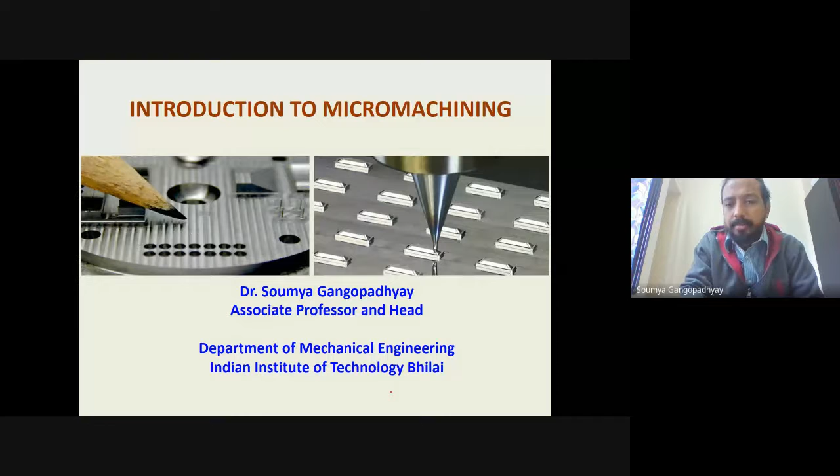Okay, no, I was trying to give just a brief introduction, just the background story, and then I would like to go slide by slide. No. Okay, so fine, so this is the background.

Why we should go for this micro machining, and that's why I took a lot of interest, well, I am working in the domain of metal cutting at the macro level. I also do non-conventional machining like electro-discharge machining, electrochemical machining, again at the macro scale. But there are enough opportunities to work in the domain of components where micro features need to be generated, and it is an emerging area. You will not find a lot of research groups still in India working in this domain.

There are a variety of reasons maybe, but let us talk about why we need miniaturization. I have talked a little bit about the background information, the brief introduction of micro machining. Now the thing is, less material consumption during manufacturing.

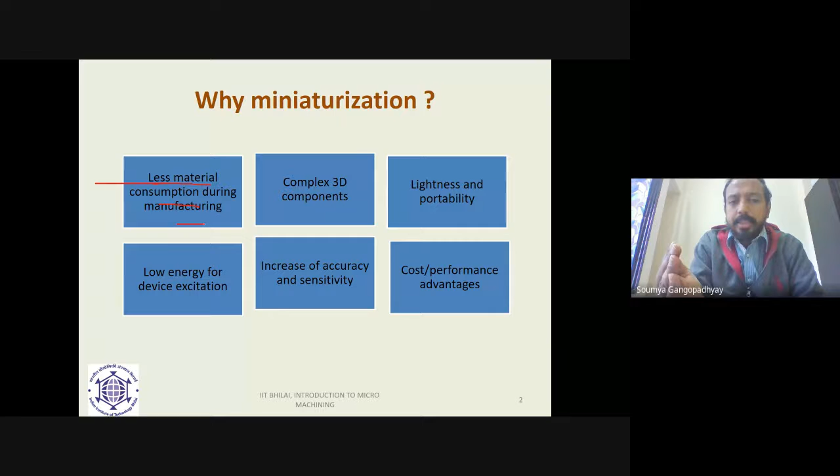Micro machining involves the speed, feed and depth of cut at a very, very low level. Whether you are doing micro turning, micro milling, micro drilling, micro EDM, or micro ECM, the amount of material which gets removed is very small, and the features that we need to generate can be obtained by minimum material removal. So less wastage of material is one thing.

Then there are many complex 3D components, 3D features, which cannot be generated with the conventional machine tool or conventional cutting tools. Traditionally, when talking about these 3D components, we take the help of a milling cutter.

Milling operation is a very versatile operation, and there are hundreds of different types of milling cutters that make it more versatile. Virtually any different types of shapes, 2D or 3D, can be fabricated using milling operations, right? But then it is fine.

But then when there are some geometrical complexities, and there are 3D textures, free form surfaces, and that too in a miniaturized form, those actually require miniaturization. Many times these 3D components are not very economical to be generated on a macro scale. Rather, they are required to be generated in the miniaturized scale - I would not say micro, I would say miniaturized scale. For example, 1 millimeter, 2 millimeter dimensional features of a particular 3D component - that is still miniaturization, and that can be done by micro machining.

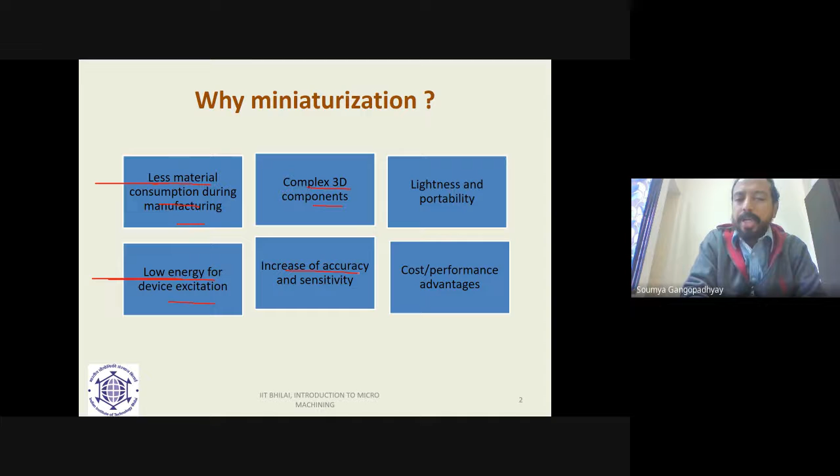And then, when you are doing your work on a very small region, the chance of accuracy, the sensitivity - you can maintain at a high level. When it becomes very big, very huge, very bulky, the chance of accuracy, chance of precision, and the sensitivity, everything will be difficult to achieve at a very high level. On the other hand, if it is on the lower scale, a smaller component, it is more easier.

Last but not the least, there is obviously the cost per performance advantage - that means the cost by performance is low, right? Because why is cost per performance low? Because you are downsizing the component, but you are not sacrificing any functionality of the component.

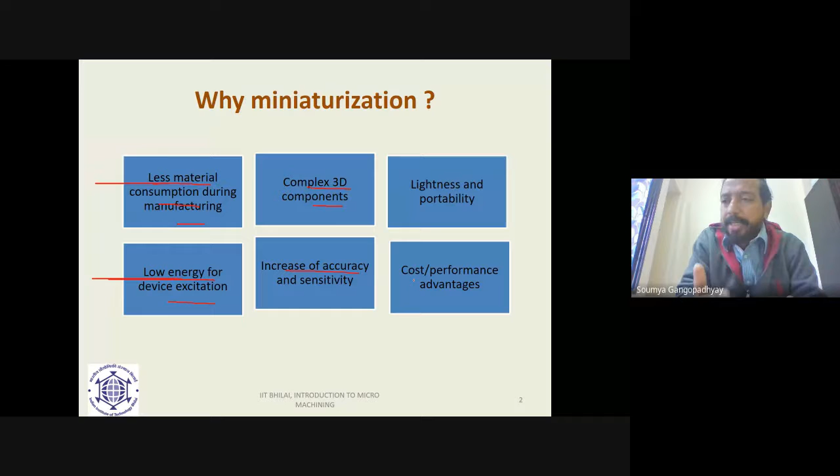Rather, with the advent of technology, you are making the product, even when you are making it compact and small size. So what is the advantage? Advantage is when you are making it smaller, making it more compact, downsizing, then the material requirement gets reduced, so the material cost is reduced, and its performance still can be enhanced, and that leads to the profitability of the component, right?

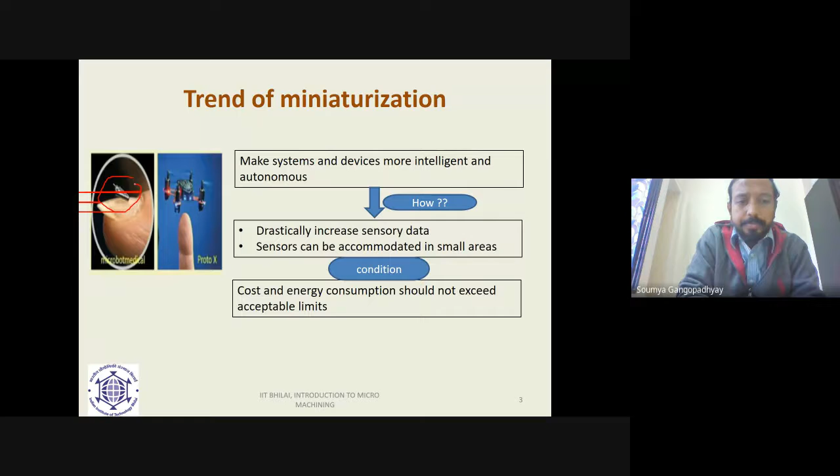So, moving on in the same direction - this actually shows the biomedical components, right? It is a kind of robot being shown here, which are micro robots.

See, the robotics again is a very good example. In industry, you might have seen huge robots in the assembly lines and many other applications, and their size is very huge. Of course its size is justified for a particular application - I'm not saying otherwise - but for some particular applications, you can develop miniaturized robots which can be used for biomedical applications. It can take a lot of information as it can be used as a diagnostic tool.

In fact, as an advanced medical diagnosis tool, people are using micro robots for getting a lot of information from human bodies, from the external surface of the human body. Even you will be amazed to know these micro robots can be actually put inside the human body to extract information from inside. I'm not an expert in that, but I have gone through journals stating that this type of micro robots are being manufactured and used extensively, particularly in USA and European countries.

Okay, then these drones, right? When drones were first invented and developed, there were huge drones used to capture, monitor data, taking photographs, videos, etc.

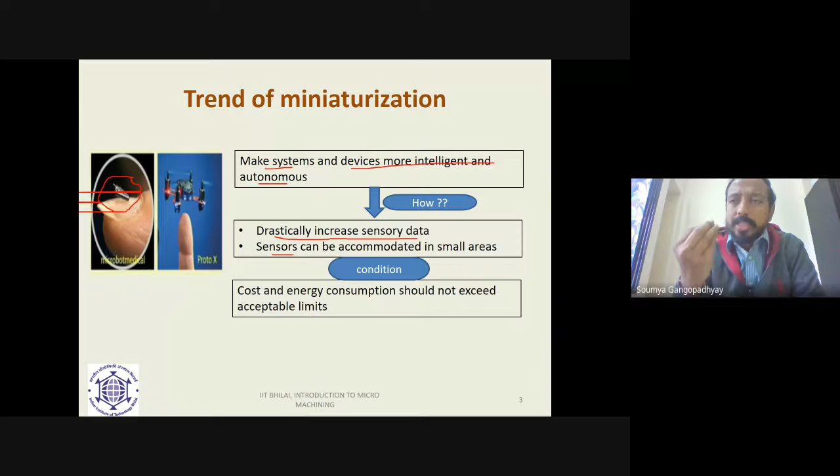How is it done? It is done by drastically increasing the sensory data through advanced sensors. In fact, advanced sensors are also manufactured by micro manufacturing techniques, and these miniaturized sensors can be accommodated in small areas. So it ultimately boils down to the sensors, which are again very small in size. Previously sensors were bulkier, larger size, but now we have the capability to manufacture sensors at a very miniaturized scale.

By downsizing significantly, you are able to introduce more different types of sensors in a particular component, making it more intelligent, smarter, and autonomous.

Having said that, you have to keep in mind that while doing the downsizing and miniaturization of electronic components, you should not forget about one very important fact: cost and energy consumption. If you are increasing cost by doing all this miniaturization, or escalating the energy consumption of the device, then there is no use.

Your components may be intelligent, smarter, more autonomous, but if it is hugely costly and non-affordable, it is of no use. If the energy consumption is very high, it is also of no use. So it has to be energy efficient and cost efficient - these two things are very important parameters in industry.

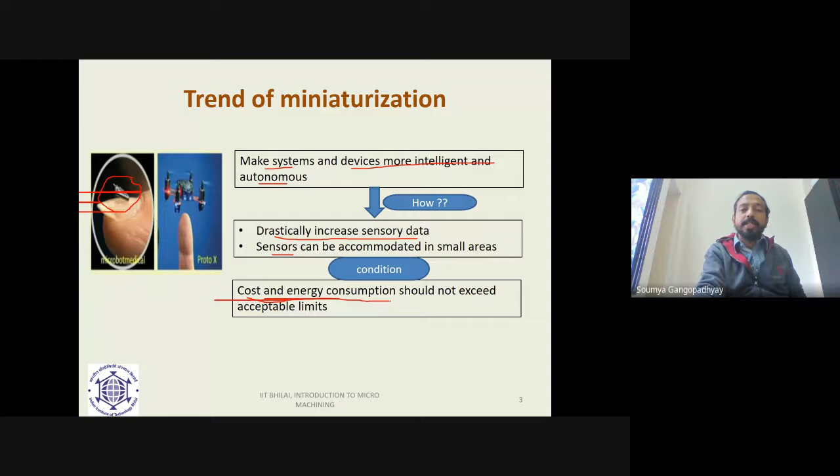For us academicians and researchers, we often do not give much emphasis on these two aspects: cost, productivity, energy consumption, etc. We rather put more emphasis on developing technology and improving product quality. But productivity, cost, and energy consumption are the major requirements from industry that should not be sacrificed while we are doing miniaturization. That is a very important aspect.

I have given many examples, but I would like to quickly tell you that this now has a lot of applications. These miniaturized components, which can be manufactured by micro manufacturing techniques, have many applications in biomedical and bio-MEMS. Bio-MEMS is a very emerging area where a lot of micro electromechanical systems can be developed for biomedical applications. This is called bio-MEMS, and it has now gone beyond micro, to the nano level as well.

From MEMS it has gone down to NEMS, that means nano electromechanical systems. This topic introduces us to a very fascinating world of manufacturing, where there is a paradigm shift. We are observing, in the last 10 years, a revolution in the concept of manufacturing - in terms of downsizing components and making them smarter, more intelligent, and more autonomous.

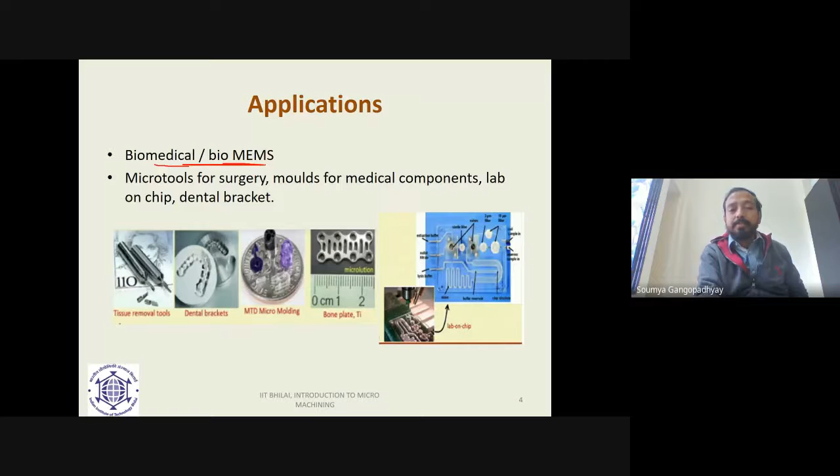Other examples, as I said, are micro tools for surgery. There are a lot of micro surgical tools available nowadays. However, again, in India we are lacking. I have chosen this topic very specifically because this is one of my fascinating research areas where I have been doing a lot of work nowadays, because in India there are hardly any indigenous manufacturers who develop these micro tools for surgery.

Many times we have to import these surgical tools from abroad, and they are hugely costly. But if we can develop micro manufacturing technology on a wide, industrial scale, we will be able to develop a lot of startups and industries to indigenously develop so many miniaturized components for various applications, like molds, medical components, and lab on chip.

Some of you might have heard about the concept of lab on chip. Basically, you are developing chips, downsizing them, and creating a kind of laboratory setup, for example, for microfluidics.

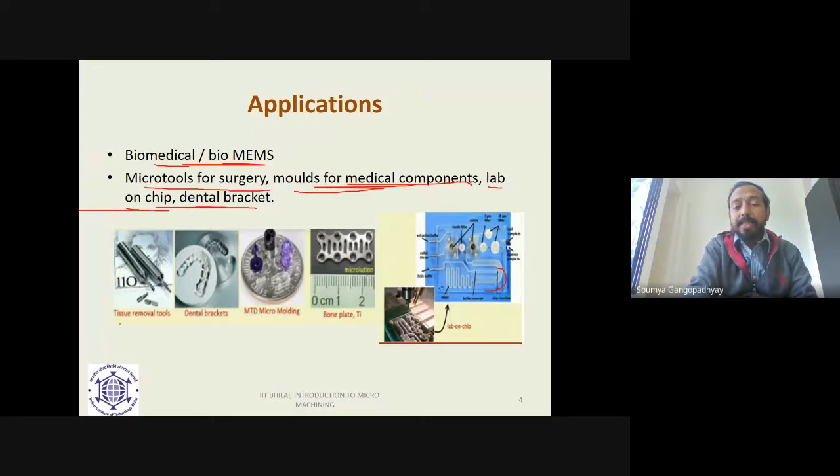Similarly, dental brackets, dental implants, or any other biomedical implants require extensive use of micro manufacturing. Not only in medical or biomedical applications, but even watchmakers, jewelry, watch base plates, molds for rings and pendants, etc.

You can see the figures—these are all small, complex 3D features, which I have already discussed in my previous slides, that need to be developed, requiring micro manufacturing technique. This completes my application side, which I felt was important to highlight, so we understand the requirement of micro manufacturing nowadays, particularly in India.

One particular application I would not like to skip. Having discussed all these applications nowadays, we are talking about micro manufacturing or mechanical micro machining, these trends of miniaturization, developing a lot of miniaturized components. Can anyone tell me in the audience which was the first country that started the concept of micro manufacturing at a very old age?

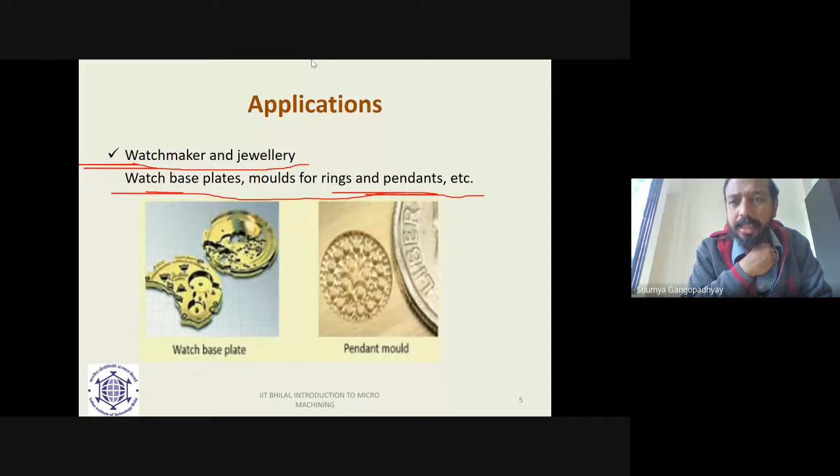But I don't know exactly when the stent was first developed. I don't think it was developed 30-40 or 50 years back—is that so? If yes, it would also be one of the first products requiring micro manufacturing. But I think the stent was developed some 20-25 years back, not 30-40. I'm talking about a product from 30-40, even 50 years back, a very famous product, unlike the stent, which has a very limited application.

Let me tell you about the wristwatch, primarily the Swiss watch made by Switzerland. I don't know exactly when it was developed, you can search in Google and find it immediately. It's definitely 40-50 years back, or even earlier than that. So why is the Swiss watch actually very, very expensive?

Swiss watch used to be expensive. Now nobody talks about this Swiss watch, right? Because there are so many other watch manufacturers, it has actually reduced the glory. But when I was in my childhood, or my father's generation, they were fascinated about this Swiss watch, and it was absolutely expensive.

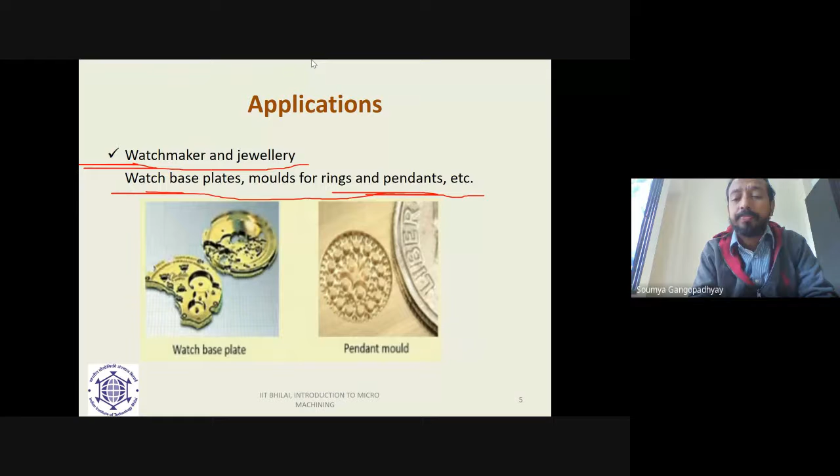Why? Because nowadays the world is now aware of the micro manufacturing technologies. There is no confidentiality. People can manufacture micro gears very, very easily nowadays. If you have the technology, you can actually make the watch. A Swiss watch can also be built in India, and therefore it has lost its glory. But imagine, I am talking about the 1960s, 1970s, 1980s, micro machining was existing and the technologies were known by the Swiss watch manufacturers. These are very, very fascinating information.

Coming to the topic again, this is the classification of micro machining. When we are talking about micro machining, there are two types: one is the traditional micro machining, and another is the advanced manufacturing, advanced micro machining.

What is traditional micro machining? Traditional micro machining is primarily the mechanical micro machining. It can also be called mechanical micro machining, like micro turning, micro milling, micro drilling, because these technologies are based on conventional machining techniques. Turning, milling, drilling are all conventional techniques, but by miniaturizing these processes, we are getting micro turning, micro milling, micro drilling, etc. These are called traditional micromachining, also called mechanical micromachining.

Similarly, advanced micromachining is primarily based on non-conventional machining techniques. All of you know the non-conventional machining techniques like abrasive jet machining, abrasive water jet machining, ultrasonic machining. These are non-conventional machining techniques, and with the development of technology, all these things can also be downsized to call them micro machining.

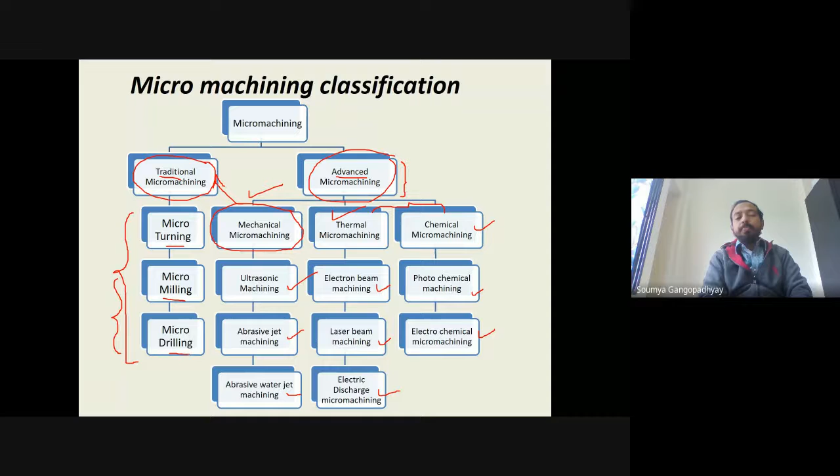Now, the same thing applies to micro milling and micro drilling - you can reduce the size of the cutter. In macro milling, we talk about a 10 millimeter cutter, 50 millimeter cutter, 100 millimeter cutter, 200 millimeter cutter. In micro milling, we talk about 0.5 millimeter cutter, 1 millimeter cutter, 0.4 millimeter cutter, 0.3 millimeter milling cutter. The same goes for drilling operation as well.

But at the same time, I must highlight it is not just downsizing the dimension of the cutting tool - the feed and depth of cut also need to be considered at a micro level. Then only it will be qualified under the domain of micromachining. I hope you are getting the point.

Similarly, if we are talking about advanced micromachining techniques, many people know about electro discharge machining and electrochemical machining. So I can take the help of electro discharge machining and electrochemical machining to discuss this micromachining concept - it is the same concept.

Let us take the example of electro discharge machining. But when you are downsizing it to electro discharge micromachining, what is the requirement? The requirement is to drill a hole - for example, if you are creating a hole using electro discharge machining, then it should be a micro size hole.

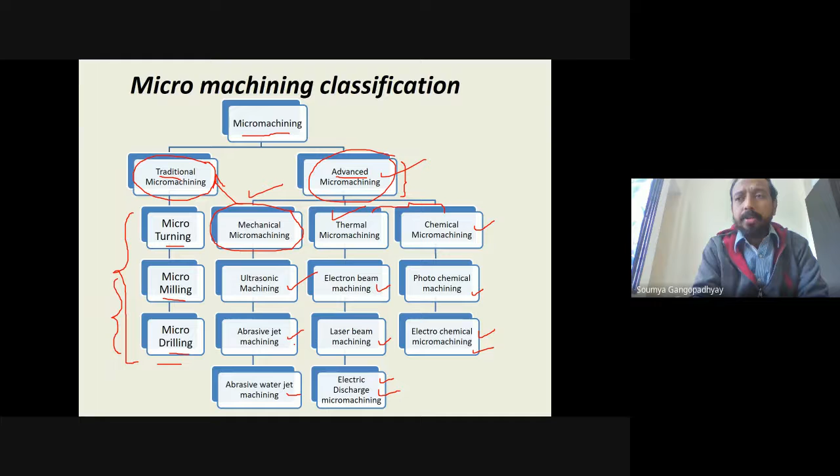So there are modifications. What I want to emphasize through the slides is that there are various types of micro machining processes, and ultimately it goes down to downsizing the tool. It goes down to downsizing the features that you are creating through the processes, and last but not the least, downsizing the parameters which are responsible for this machining action. Whether it is non-conventional machining based micro machining, or micro machining based on the traditional machining concept, the concept remains the same.

Okay. So from now, for the last, say, half an hour, I would like to devote myself to the basic concepts of mechanical micro machining, under the traditional micro machining domain, not the advanced micro machining domain, because that is the research work I am currently working on. So again, as I said, I do not have the opportunity to show you the research work, but I thought it important to first discuss the fundamental aspects and requirements of micro machining.

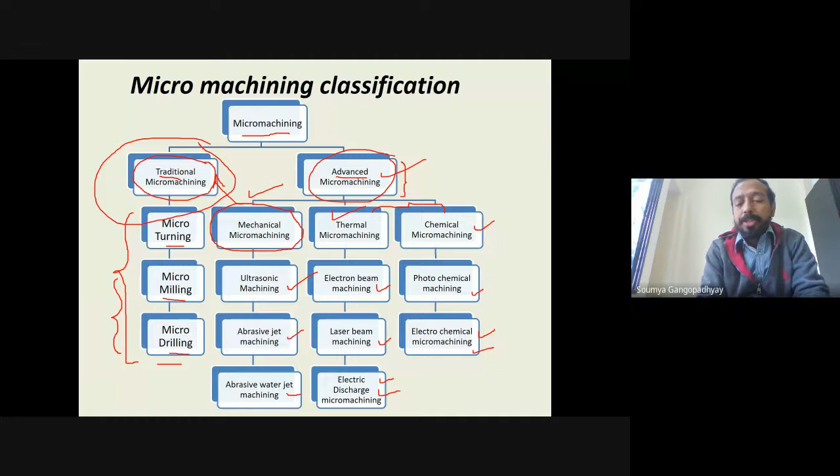So I will devote myself in the next half an hour to the fundamental aspects of traditional micro machining, that is mechanical micro machining. The most important aspect which distinguishes it from macro machining is the size effect, and I would like to discuss this concept in a bit of detail.

But before that, let us talk about, as a recapitulation, the Merchant theory for macro machining. In our undergraduate metal cutting course, we learned about Merchant's theory, but that was actually applicable for the macro domain. What are those assumptions? If you recall, the cutting edge was perfectly sharp.

There was no contact between the tool and the workpiece material along the clearance surface. Because of flank wear, there is a contact which develops between the flank surface and the workpiece surface, but that we neglect in Merchant's theory. The cutting edge is absolutely sharp.

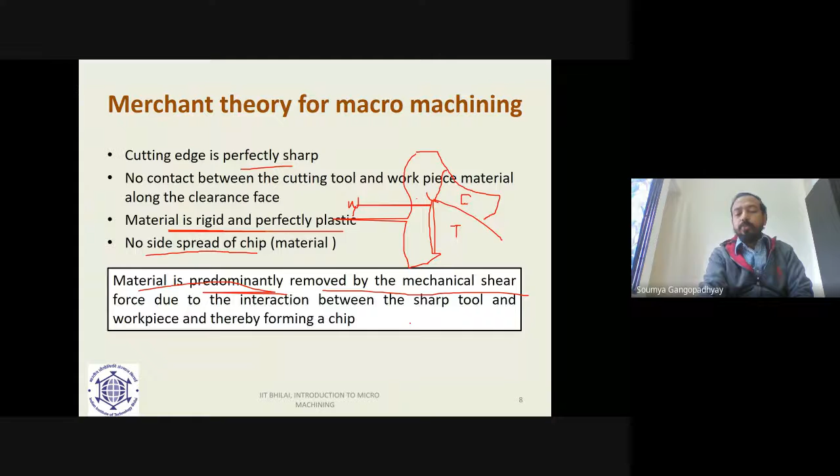Now the question is, when you go to the micro domain, Merchant's theory is not valid anymore. Why? Because the radius of the cutting edge suddenly becomes very significant. So this is conventional machining.

This is conventional machining - the cutting tool is very sharp, and then it generates the chip, exactly as in the figure I drew previously. But then this is micro cutting, the next figure. Here you see the radius of the cutting edge suddenly becomes very significant.

Now why does it become significant? It is simply because of the uncut chip thickness. What is uncut chip thickness? It is this one here - very, very, very small.

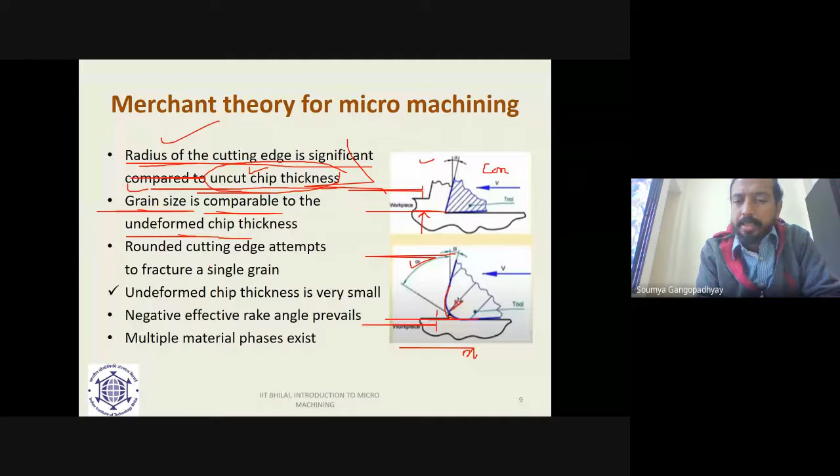The grain size is in the range of 1 micron, 2 micron, 5 micron, 10 micron. What is the undeformed chip thickness? Again, 1 micron, 2 micron, 3 micron, etc. What is the cutting edge radius? In the same order of magnitude. So three things are of the same order of magnitude: grain size, edge radius, uncut chip thickness. And that makes things complex, because this rounded cutting edge

actually attempts to fracture a single grain. And that's why when you are trying to attack a particular single grain, it will encounter or experience more resistance. The grain will offer more resistance compared to the grain boundaries. Grain boundaries, as you know, are weaker, and the deformation takes place through the grain boundaries, and it is easier because that is the weakest path. But then when you are encountering a single grain, it becomes difficult to cause fracture or deformation.

Since the cutting edge radius is of the similar order of magnitude as the grain size of the workpiece material or the tool material, then it becomes very, very difficult to cut. And as a result, specific cutting force and specific cutting energy become very high in micromachining.

Again, my last statement is very important. Specific cutting force, specific cutting energy is quite high in micromachining. In macromachining, it is not the case. Why is it not the case? Because the undeformed chip thickness is very high compared to the grain size, compared to the edge radius. Therefore, they are not considered in the chip formation mechanics. But in micromachining, you have to take care of the grain size and the edge radius in the analysis or in the mechanics of chip formation.

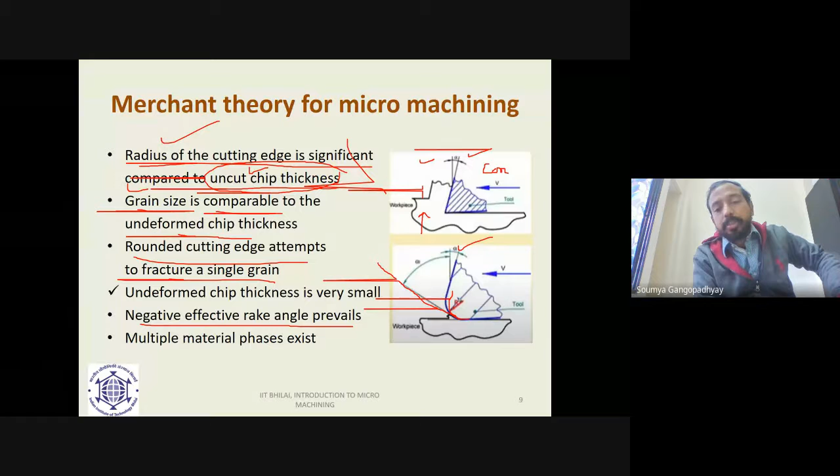What do you mean by the specific cutting force? It has two definitions. One is the force to remove unit volume of material can be considered as the specific cutting force. Similarly, specific cutting force can also be defined as the force per undeformed chip area. I repeat, specific cutting force in micromachining can also be defined as the force divided by undeformed chip area. And why is the specific cutting force very high in micromachining? Simply because the undeformed chip area is very, very small. Why is the undeformed chip area very, very small? Because the undeformed chip thickness is very small, and therefore the cross section of the undeformed chip area is also very small, and therefore the net effect is specific cutting force is very high.

And then multiple material phases exist because the workpiece actually consists of different phases. It is ultimately an alloy, and therefore there are different phases present. Pearlitic, if you are considering steel, martensitic phase, pearlite phase, ferritic phase, etc., exist at different locations. If you are considering Inconel, then gamma prime phases exist. So different phases exist even in a single material at a very micro scale. But when you are doing macro machining, the microscopic inhomogeneity present in the workpiece gets nullified. But in micromachining, this microscopic inhomogeneity present becomes highly amplified, making it a challenge. And then the specific cutting force increases, the specific cutting energy increases.

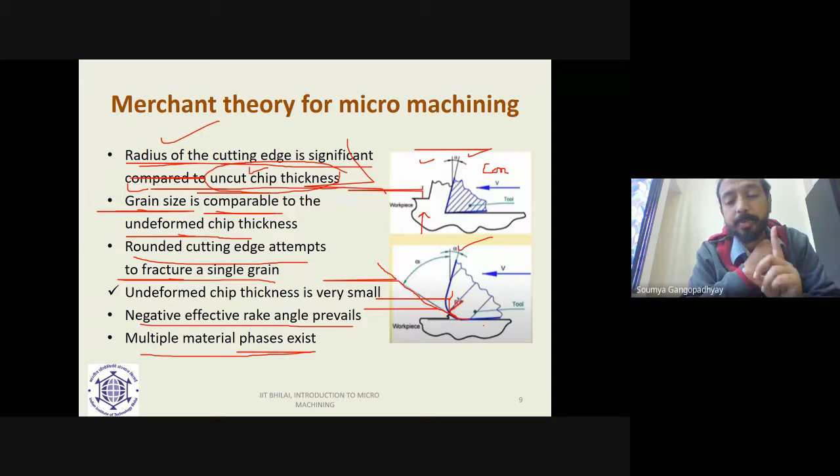Okay, so if I want to distinguish between micro machining and macro machining, although I have told a lot of things already, this is perhaps the summary, with one or two new things in this slide. That microstructural level I have talked about, and just now I talked about the difference between micro machining and macro machining.

In micro machining, we are attacking a single grain, and therefore the resistance to deformation is high. Rather, the grain boundaries are weaker. In macro machining, the deformation takes place through grain boundaries, because the undeformed chip thickness is very high and the area of contact is on a much larger area, so grain boundaries are encountered, not a single individual grain.

Deformation is therefore easier. Tool dimension I have already talked about, I am not repeating. The feed I have already talked about, I am not repeating - exactly the same thing applies. Minimum chip thickness is something I need to talk about.

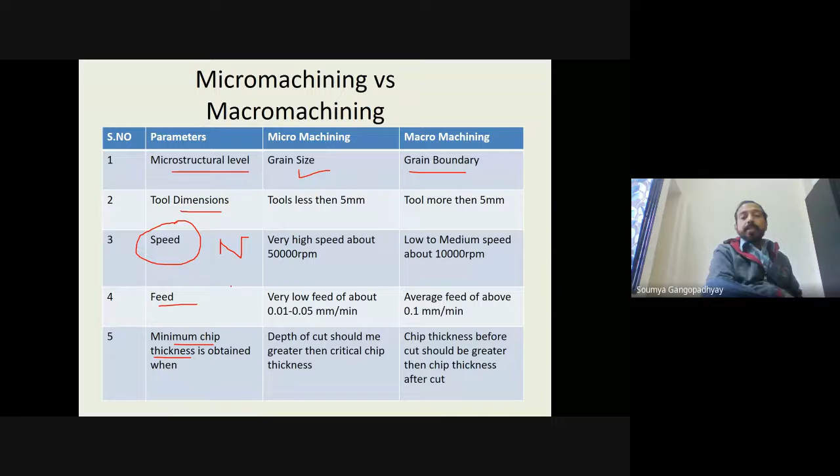But first, let us talk about the speed. When I am talking about speed here, I am talking about N, the RPM, spindle RPM, not the cutting speed. When differentiating between micro machining and macro machining, I am primarily focusing on the spindle RPM. In micro machining, the spindle RPM in most cases is very high - 20,000, 30,000, 40,000, even 1 lakh, 1.5 lakh. It is that high.

When talking about macro machining, although it is written 10,000 RPM, let me tell you, 10,000 RPM is mostly not used in the macro machining domain. What is the typical RPM when doing a turning operation? 200, 300, 500, 600 RPM. When doing drilling or milling operation, what is the RPM? Same thing, maximum 1000 RPM, or maybe 1500 RPM. So that is the working range of RPM we deal with in the macro machining domain.

What is the reason? The reason is the tool diameter is very high. If it is a turning operation, the workpiece diameter is very high, and therefore to have a particular cutting velocity - for example, you need a cutting velocity of 50 meter per minute.

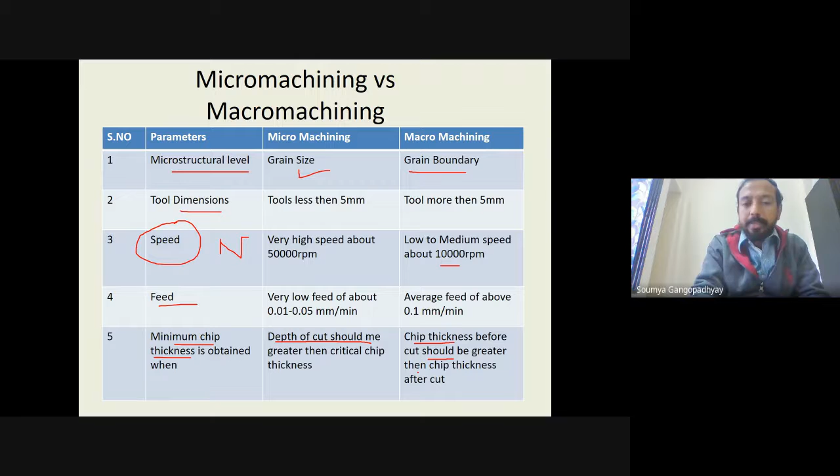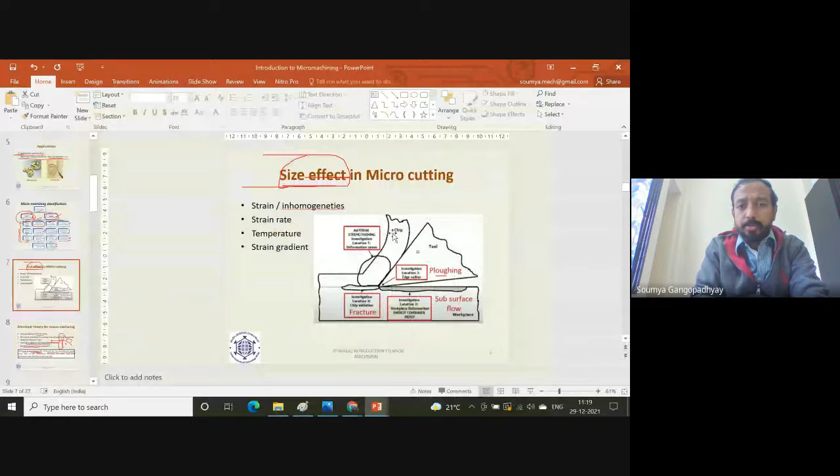Okay, just a minute, I'll just take a break of a few seconds.

Yeah, I am back again. I hope my screen is again visible. So I was talking about this plowing dominant thing.

Now, please try to understand that when this undeformed chip thickness is very low, very low, what happens is there is actually material strengthening or stagnation which takes place in front of the tool. Okay, just like in agriculture, plowing - what we have seen is there is no material removal, rather it gets side flow on both surfaces, on both sides material flows out.

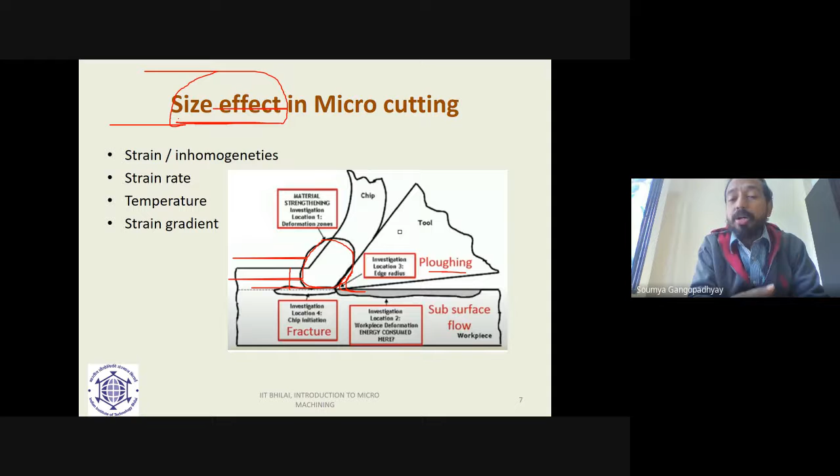Ultimately it boils down to feed. You change the feed, you will change the uncut chip thickness. Ultimately your objective is to have plastic deformation in the form of dominant shear mode, not the elastic deformation dominated by plowing and rubbing. This is the most fundamental aspect in micromachining, which is characterized by size effect.

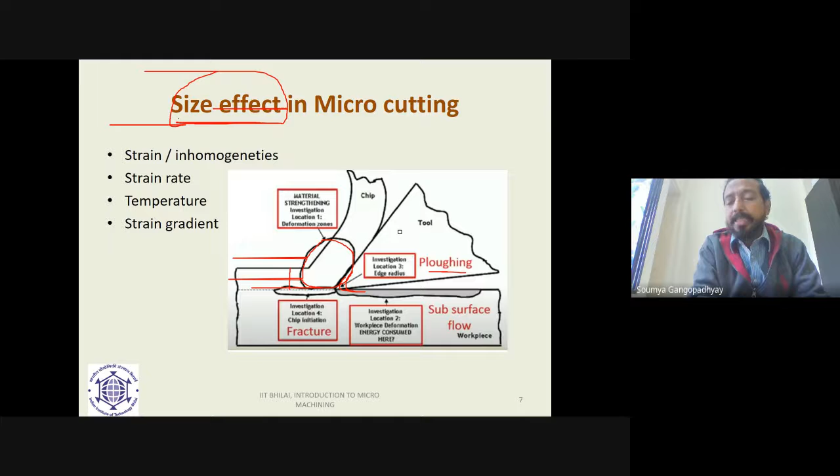In macromachining, there is no size effect because the undeformed chip thickness is high, because the feed is high. But in the micro cutting regime, the size effect dominates, and therefore it makes it challenging, and it actually leads to high specific cutting energy.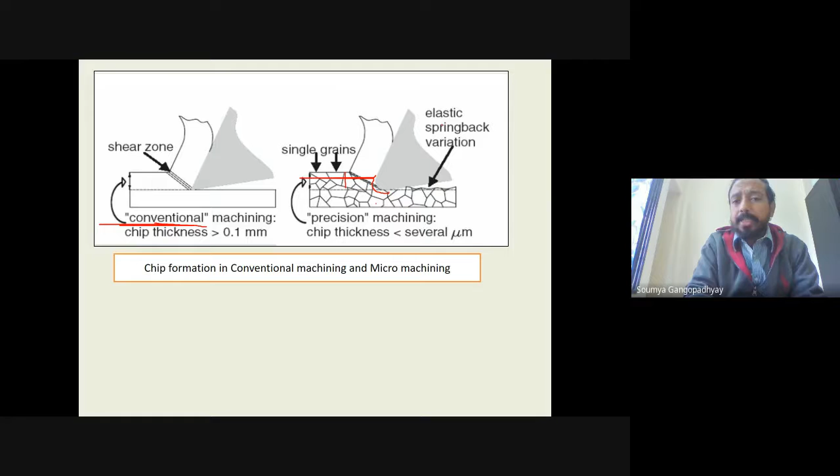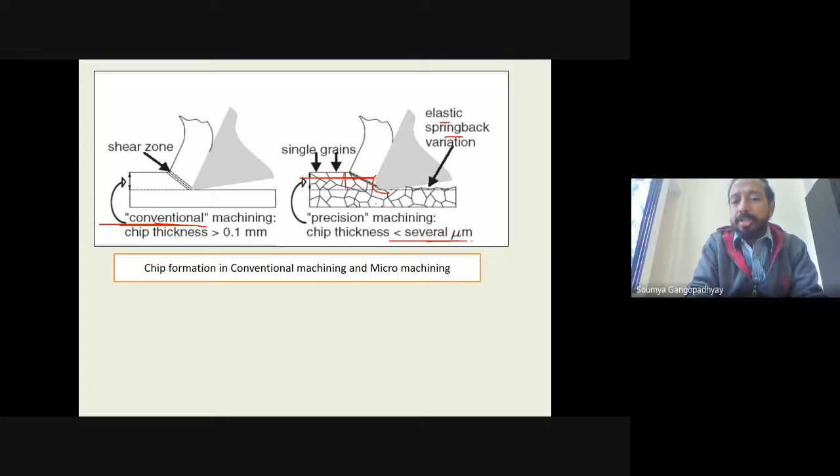But it is in precision machining or micro machining where you see the edge radius, undeformed chip thickness, grain size, all single grain, and then there is a chance of elastic spring back because of these things. Only chip thickness is several microns - 2 micron, 3 micron, 4 micron, 7 micron, etc. And this is the undeformed chip thickness H.

This is the three conditions - that's what exactly I have talked about, right? That is the threshold value, critical value of undeformed chip thickness, below which you will have predominant elastic recovery. This is the condition where elastic recovery takes place, that is, elastic deformation takes place. Under what condition? When H, the undeformed chip thickness, is very, very small compared to the edge radius. Then you see chip formation does not take place.

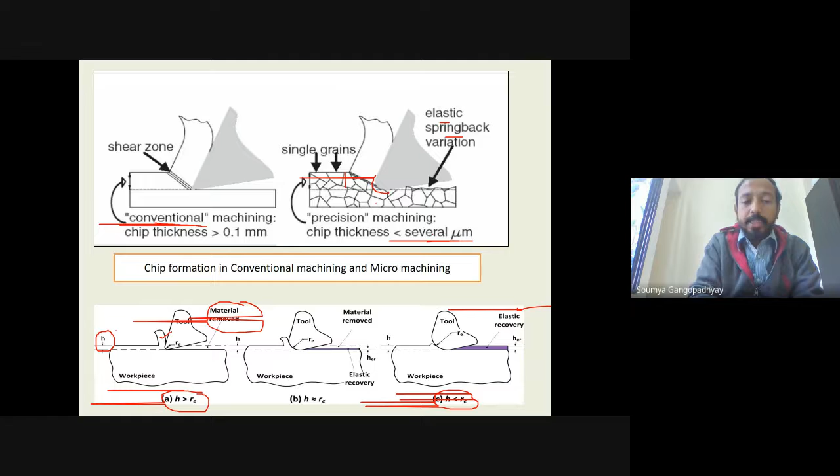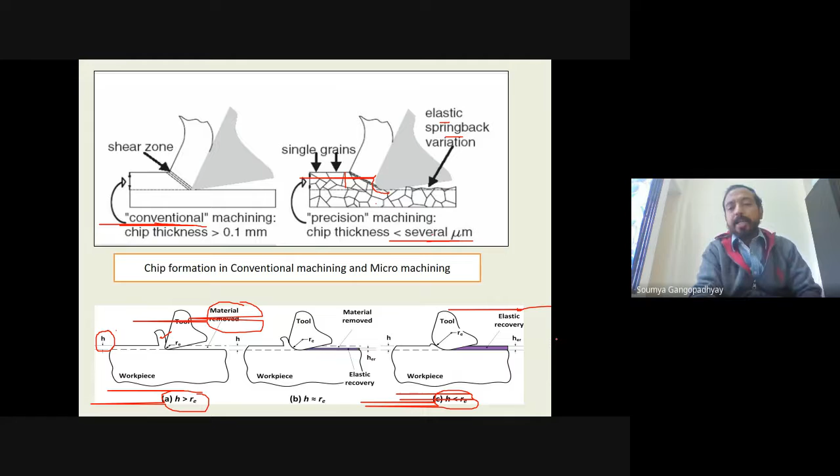But when we are increasing the undeformed chip thickness close to the value of the edge radius, then some material gets removed. And when we are increasing this undeformed chip thickness still further, then you have significant material removal, because chip formation is facilitated. Why? It is because this shear deformation becomes more predominant than the rubbing and plowing action. In other words, plastic deformation is more predominant than elastic deformation. Elastic recovery is minimal. I hope these schematic diagrams are extremely helpful in understanding the fundamentals of the size effect phenomena occurring in micromachining.

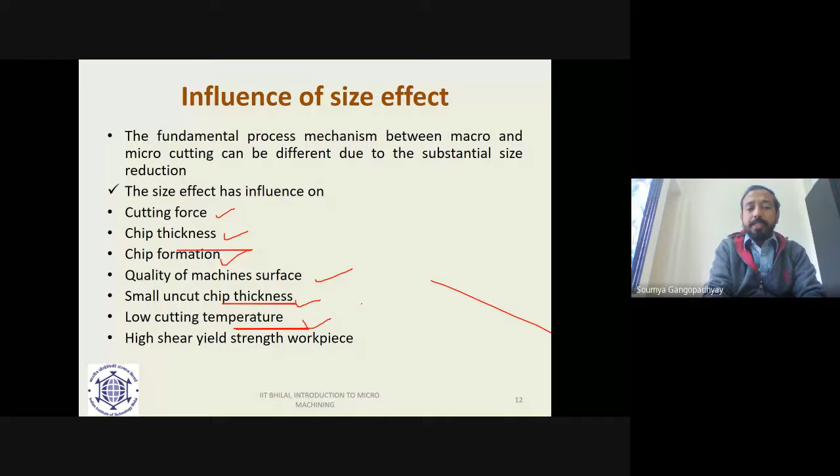So what is the effect of size effect? The size effect in cutting - it has the influence on the cutting force, it has influence on the chip thickness, it has influence on chip formation, it has influence on the quality of the machined surface, small uncut chip thickness, cutting temperature, and high yield strength of the workpiece. High yield strength of the workpiece, because you are actually concentrating on the single grain.

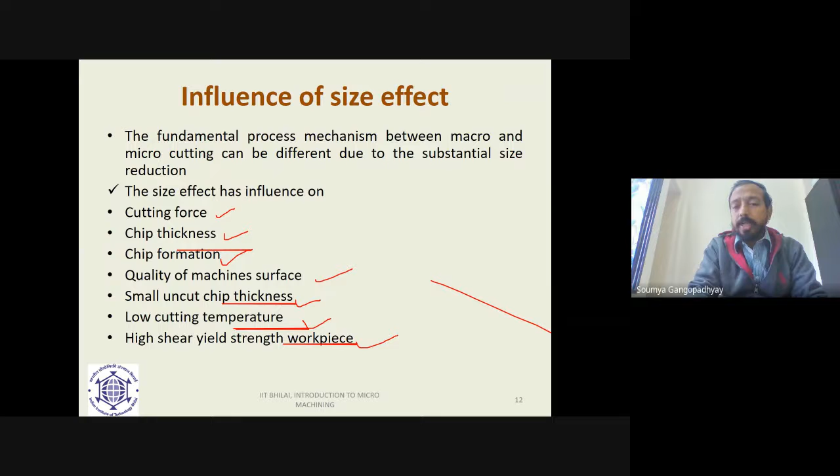So these are the things I have already talked about. The stresses applied to the tool are dependent on the individual grain orientation, because you are actually attacking a single particular grain. So grain orientation has a major role to play.

High frequency of fluctuation of the cutting force because of the inherent microscopic inhomogeneity, and last but not the least, it is unstable and there is a chance of tool breakage.

Why instability and tool breakage? As I said, there is a fluctuation because of the inherent microscopic inhomogeneity. There is force fluctuation, and the tool size is very small, it is slender, its rigidity is very less. Therefore it cannot withstand the high specific cutting force, high specific cutting energy, and high frequency fluctuation of the cutting forces, so it is prone to breakage prematurely.

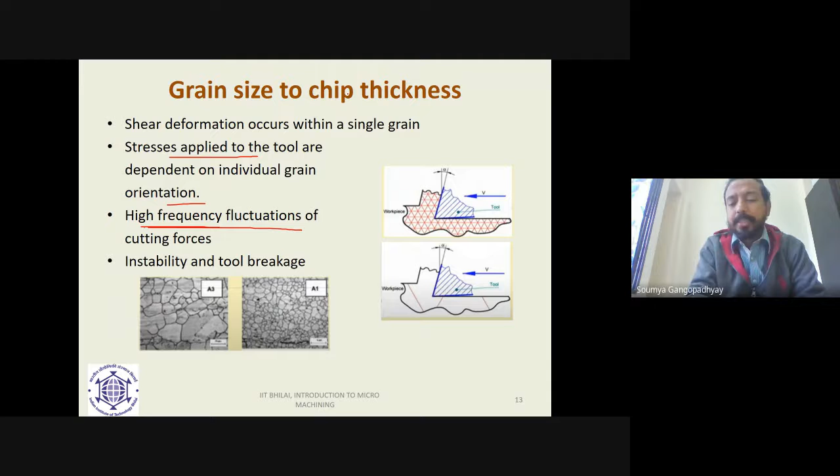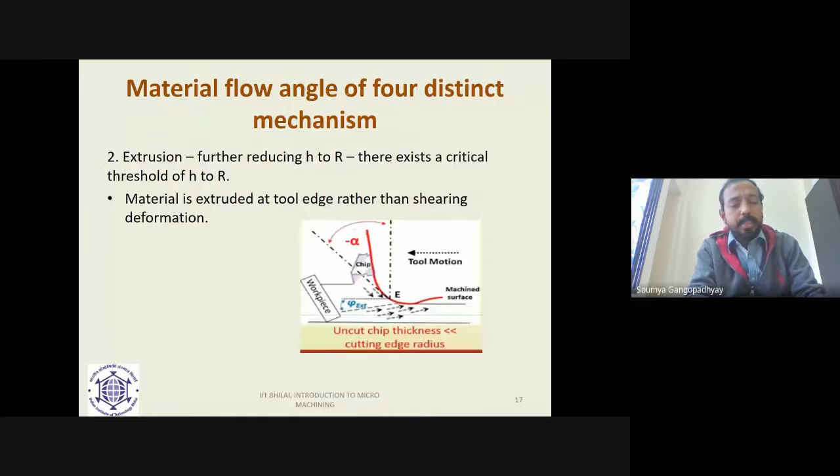These are the challenging aspects, and it requires a lot of research work to counter these problems. Since I do not have time, otherwise I could have extended a little bit, but most of the things I think I have covered as far as the fundamental aspects of micro machining, particularly mechanical micro machining.

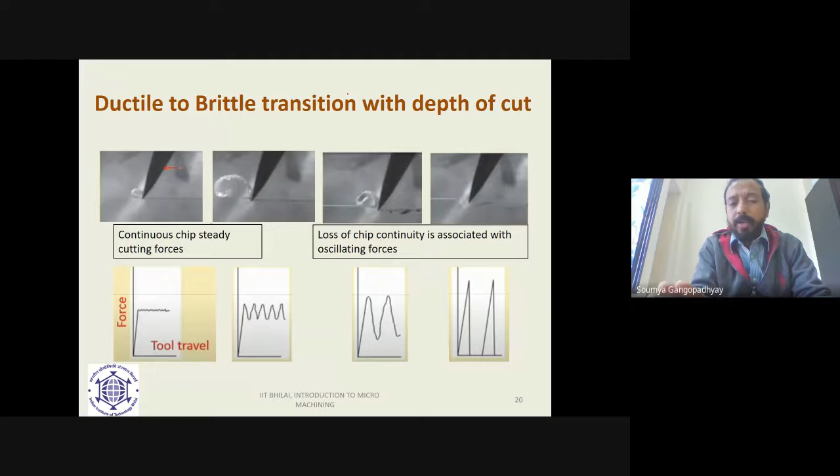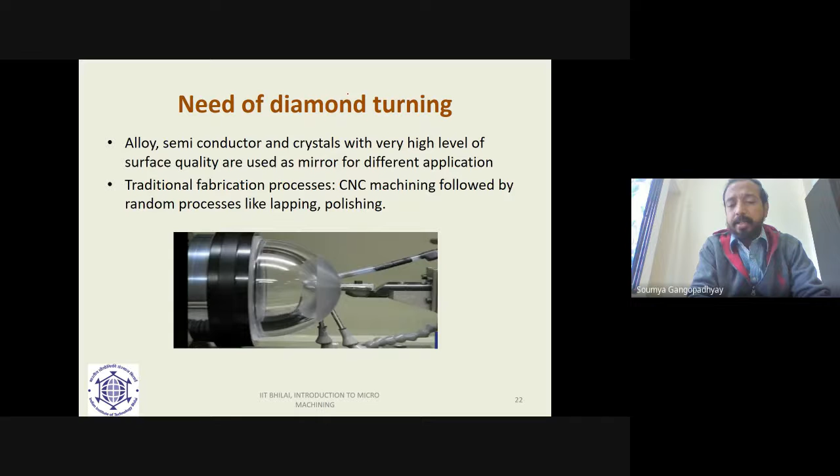This slide shows the fluctuation of the cutting force that takes place at the microscopic level. This is the diamond turning that I was talking about at the very beginning, the turning operation using the single point diamond tool at the micro scale to achieve the micro turning operation.

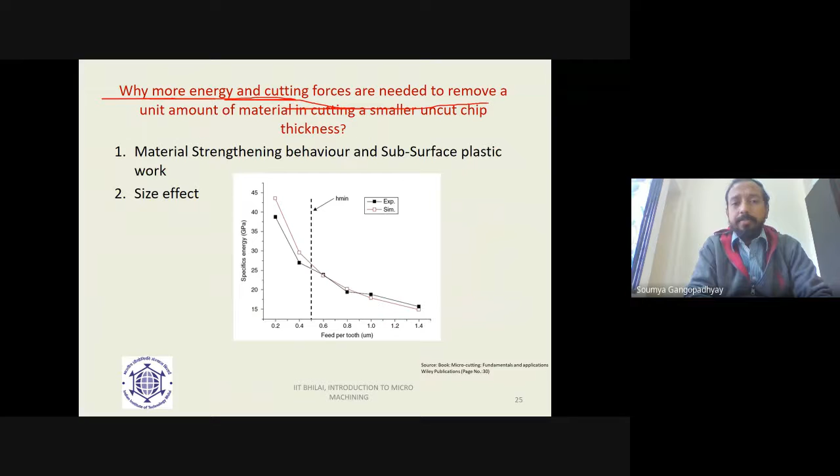So this is the specific cutting energy, and this graph shows the effect of the size effect, and why more energy and more cutting forces are needed to remove unit volume of material at lower uncut chip thickness.

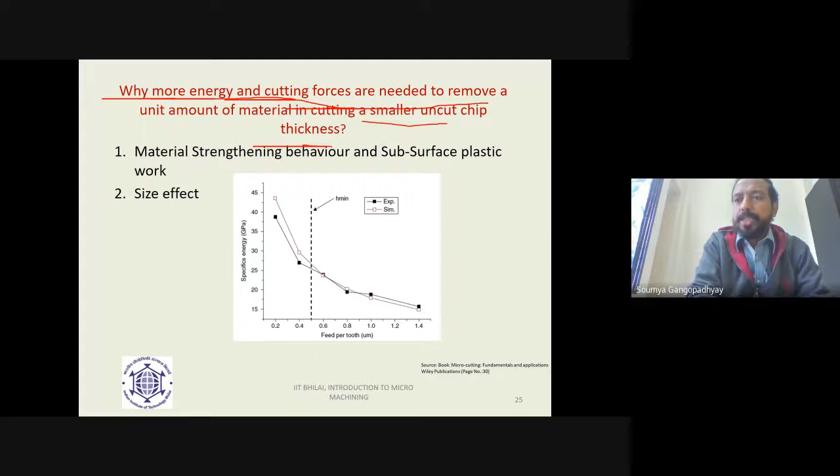So this is all about today's lecture. In summary, I have talked about the necessity of micro machining, its major applications, historical perspective, why it is important, and its major classification. Then I focused on a small topic, the fundamental aspects concerning the mechanics of mechanical micro machining at a micro scale. Thank you for your kind attention, and if you have any query, please feel free to ask me.